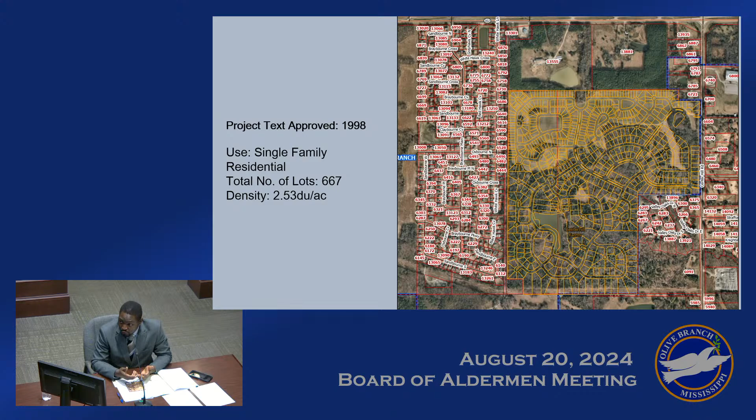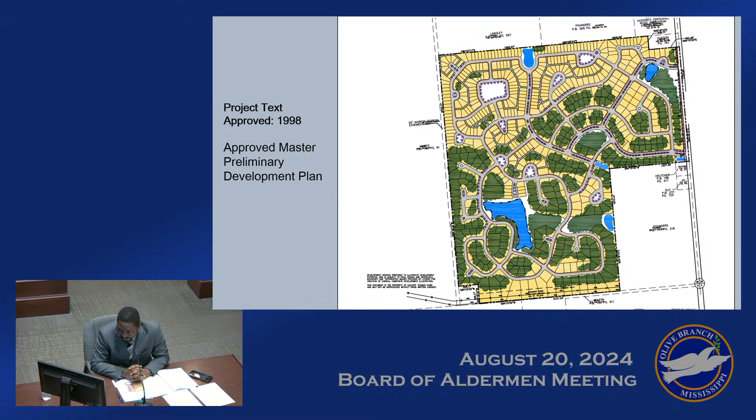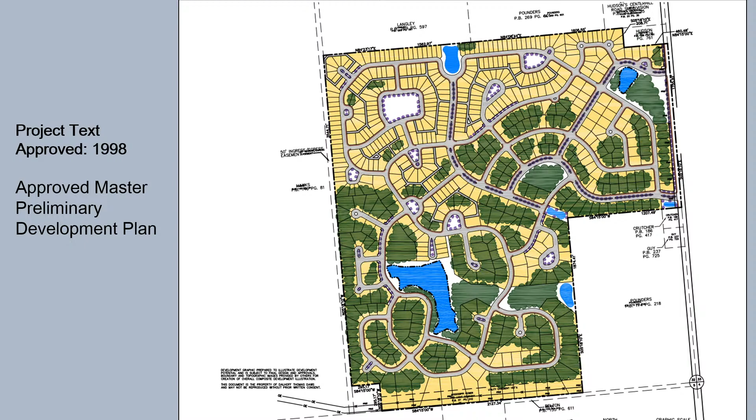On your next slide, this is the approved master plan as it was approved back in 1998. The areas shown there in blue, those are essentially areas that were preliminarily designated for stormwater management. You have a number of common open spaces that were approved in the subdivision. If you look at the areas shown there in yellow, there are a number of alleys at the back of multiple lots to the north. So that particular area has smaller lots, and the preliminary development plan required that they should be rear loaded and accessed through those alleys.

On your next slide, the developer has had to make a change in this preliminary development plat precisely because of the county's decision to extend Nail Road from Hacks Cross Road to the west, across this property at its southern edge, up to Center Hill Road. Nail Road is to be extended to Center Hill Road. With that extension, the lots that you had to the south of this property, all of those lots basically where the road is going to be are going to be taken out.

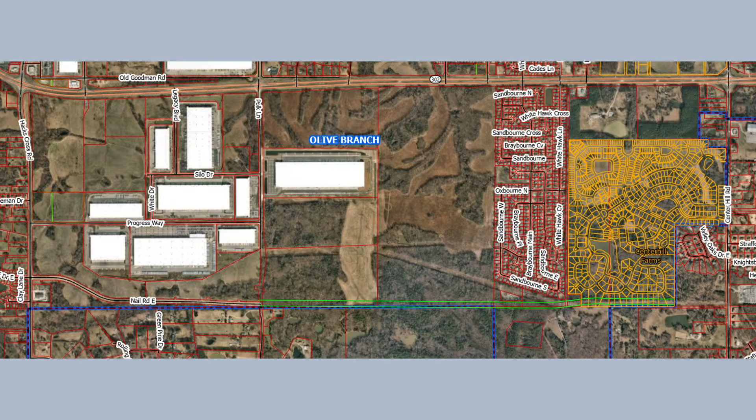The developer has therefore had to redesign the southern part of the subdivision as you see on your next slide. So the area shown there, that is the area that he has had to design to basically do one main thing, to provide a connection of that road down to what would be the new Nail Road.

So at the time when this preliminary development plan was approved, there was no Nail Road, there was no plan for that extension, it was not provided. Now that Nail Road is going to be extended, the developer has had to revise or make a few changes to that southern area to provide for that extension.

The developer proposes to develop this subdivision in 11 phases. With that change at the south end of the property, the number of lots that the developer is proposing has reduced from 667 that was approved by the county in 98 to 604. So the developer is actually losing over 63 lots in order to do that. So I did mention he's proposing to develop this subdivision in 11 phases.

A key element that comes into play with regard to this phase development has to do with the availability of sewer. The city engineer has evaluated and communicated with the developer that this particular subdivision will discharge into Brabham. The sewer plant at Brabham does not have the capacity to take in 604 lots. It does not have that capacity. What it has capacity for is 150 lots.

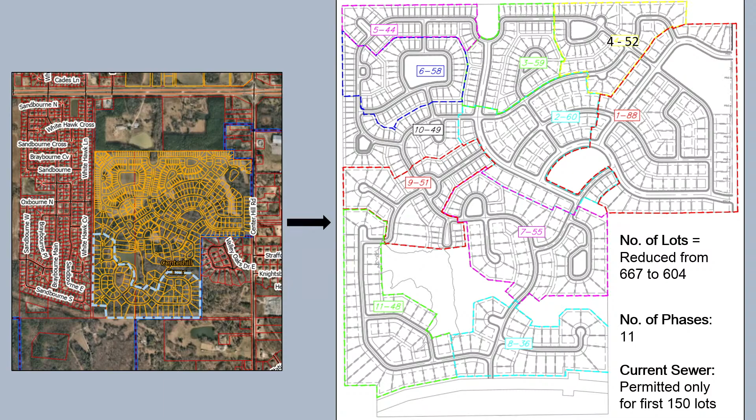Before the developer can move forward beyond 150 lots, it will require that they build an existing or a new sewer plant in the city that can take care of the lots that he will be creating beyond that point. So there is an approval condition in that planning commission did recommend to address that particular issue.

The next slide shows what was approved with respect to lot sizes in this area that is being modified. In the image to the left, you have the area designated there in green, kind of marked out in green. It had area 1, the minimum lot size there was 40,000 square feet, area 3, 20,000 square feet, area 4, 15,000 square feet, and area 7, 12,000 square feet. So the lots in that area range in size from a minimum of 12,000 square feet to 40,000 square feet.

What the developer is proposing from the modification that he has made, the minimum lot size will be 15,000 square feet, and the largest lot size will be 42,265 square feet. So in that particular area, what he is proposing, he has actually increased the minimum lot size. So what was approved by the county, the minimum lot size there was 12,000 square feet. What he is proposing, a minimum lot size will be 15,000 square feet.

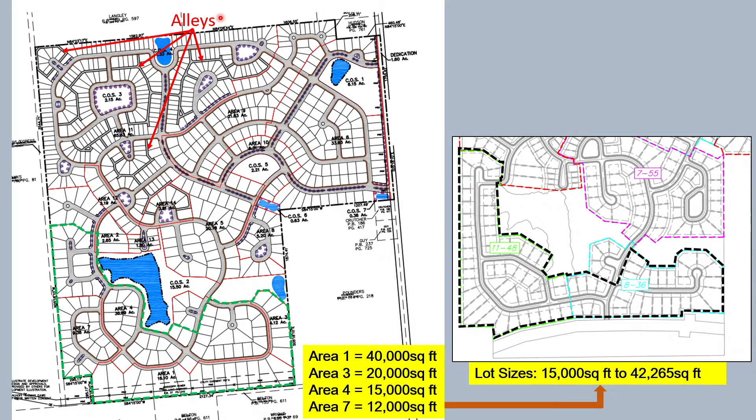On the next slide, as I did mention, you have those alleys to the north. All of those alleys will have to be provided, and they are actually included in this preliminary plat for your approval. The next slide shows the construction of these alleys. A problem we have had in the city has been the standards to which these alleys should be constructed because of the situation we have like in Stonecrest, where these alleys don't last. There is significant liability to the HOA.

And the board basically set a standard for the construction of these alleys in the Villages at South Branch subdivision, where you required that they shouldn't be V or U shape that allows water to get to the middle of the alleys and chop it off. All the water has to flow to the side of the alleys. And it should be constructed of the same thickness as the local public streets, basically. What you have in front of you is the Villages at South Branch construction plans. So everybody in the city is building to that standard, and the recommendation of the city engineer is that the alleys in this subdivision should also be constructed to this standard.

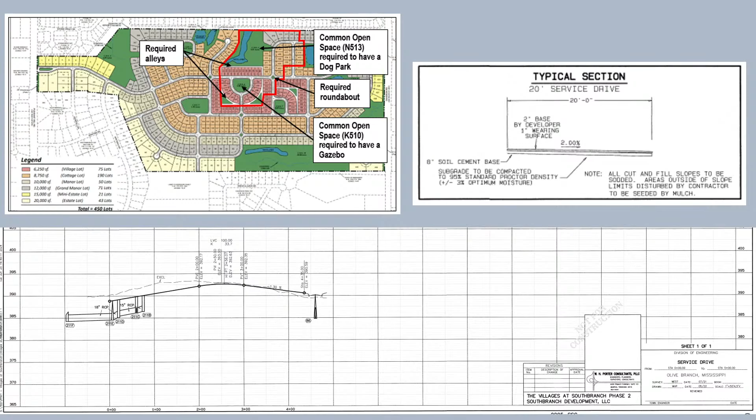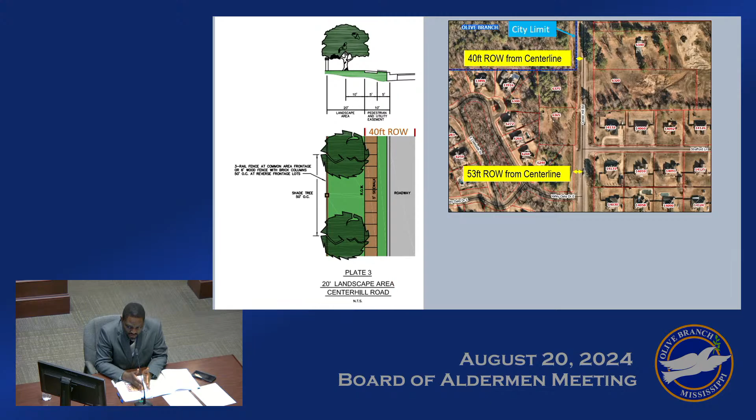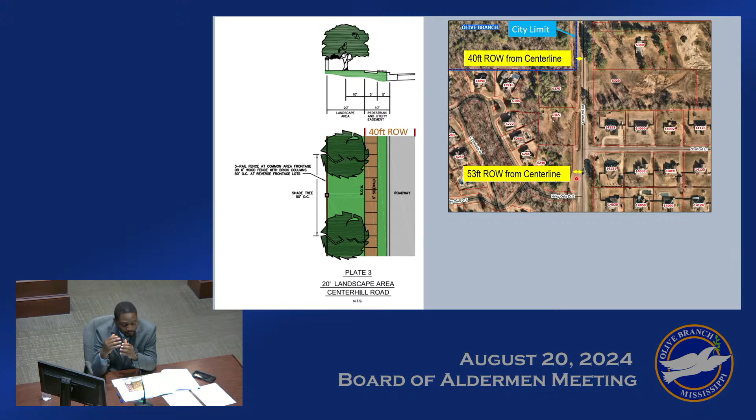That included the construction of a sidewalk, curb and gutter on Center Hill Road, and a fence. Currently, if you look at the picture, or the map that you have in front of you, the area to the south in front of Valley Oaks subdivision has a 53-foot right-of-way from center line. So that is what that subdivision was required to dedicate in order to provide a 2-lane road cross-section, ditch, and open ditch with curb and gutter for future extension.

The existing right-of-way in front of this property is only 40 feet. It's not up to 53 feet. The plat that was considered by the Planning Commission included a requirement that the developer dedicate 53 feet right-of-way to basically match what you have in Valley Oaks to the south.

To address that particular scenario, the recommendation before you is that the 40 feet right-of-way that was required in the preliminary development plan and which is currently shown here should be maintained, and then the developer will dedicate 13 feet of a drainage and utility easement. That drainage easement, 13 feet, will basically be for the open ditch for stormwater management on the rear of those lots. That will be maintained by the property owner since it's basically an easement. It's part of the real estate of those particular lots.

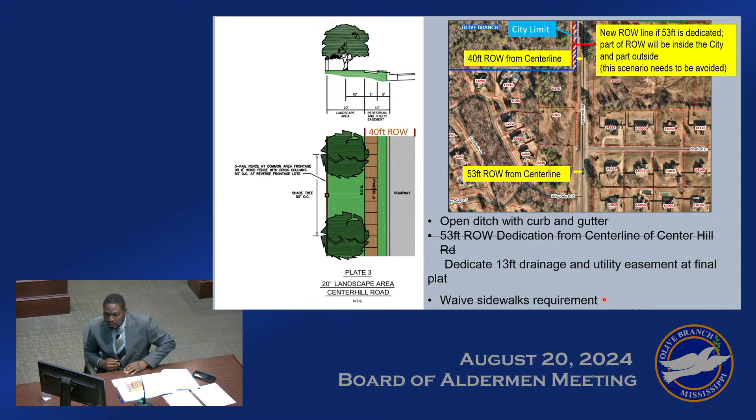Your next slide shows the plat that was considered by the Planning Commission. There are two elements here that I wish to call attention to. The first is where you have those 3 lots adjoining Valley Oaks subdivision to the south. There are property owners within Valley Oaks that have certain recreational facilities quite close to the property line. And the developer has worked with them, basically at his discretion, with respect to the grading of that particular area.

If you have to bring down the trees and grade it, and you have a swimming pool that is barely 7 feet from the property line, you may have roots of those trees under that swimming pool. If you are not careful, it's going to create a lot of destruction on the adjoining property. So the developer has worked with that property owner to relocate those 3 lots to a different area and leave that as a common open space. You will see that on your next slide.

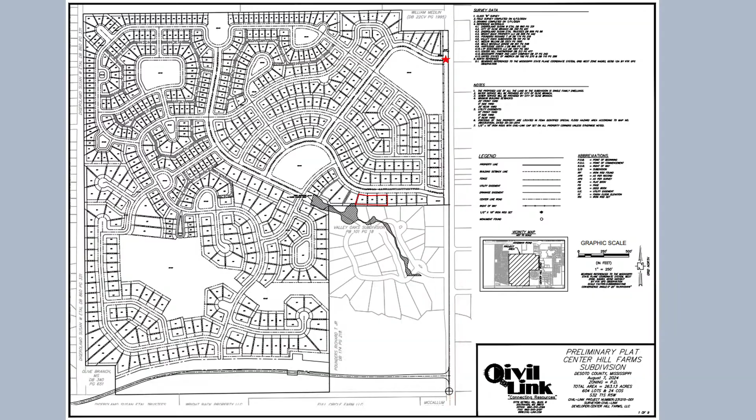The second element, where you have the star, thank you, Jason. Where you have that star, there was an email that one of the residents in Valley Oaks sent around, calling attention to a possible sight distance problem for this particular street where it intersects with Highland Lake. The city engineer went out, took a look at it, and determined that yes, there is a sight distance problem if that street intersects with Center Hill Road at that particular location.

The best location will be for the street to be moved to the north, to the high point. That's where you have the furthest visibility on both sides of the road. Consequently, the applicant has revised this plat. So the plat to the right, that is a revised plat for Board of Aldermen's approval tonight.

That plat includes the relocation, or that particular road has been moved to the north. So it's now at the top of the hill. From there, you can see over 500 feet in both directions. That eliminates the sight distance problem.

With that design, if you enter the subdivision from that particular location where you have the star, you have over 1,000 feet of a long street going down. That can become a speedway throughout that subdivision. As such, it may be necessary to put traffic calming mechanisms such as roundabouts, shown there in those blue circles, in this subdivision. A condition has therefore been added to what the Planning Commission recommended regarding these particular calming mechanisms.

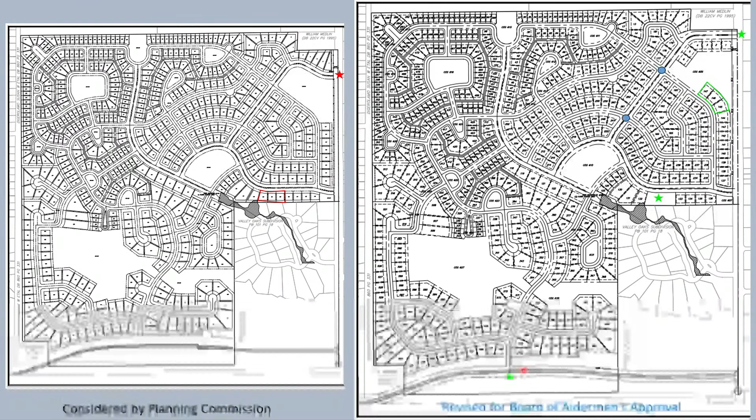With this redesign, there will also be a connection to Nail Road to the south. So the developer will be already entitled to 2 roads connecting to Nail Road. So those 2 roads are maintained. They are now at safe locations. And then you will have a connection to Nail Road to the south to disperse traffic within this particular subdivision.

The next slide shows a concern. I added this particular slide because in that particular email there was an issue regarding easements that one of the residents raised, asking for an easement, over 100 feet, that could be dedicated in the Center Hill Farms subdivision. That is controlled in the zoning, in the Act of Zoning.

So in 98, when the county approved the preliminary development plan, there was no requirement for that easement. So in their project text, preliminary development plan, it had no requirement for the easement. Of course, you had no Center Hill Road extension, and also Valley Oaks did not exist, because Valley Oaks was approved after Center Hill, I think that was 2005 or 2006, after Center Hill Farms was already approved.

It would appear that the developer of Valley Oaks took that into consideration. And so what he put in the subdivision plat for Valley Oaks was a requirement for an undisturbed area to the north. So if you look at all that hatched area, that is over 30 to 40 feet that was supposed to remain undisturbed, non-buildable in Valley Oaks subdivision.

It's unfortunate that it appears today some of the homeowners have taken down their own buffer, if I can put it that way. So any buffer within Center Hill Farms will really be at the discretion of the developer, because what we have here is a preliminary plat and not a zoning act. The city is not approving a preliminary development layout plan.

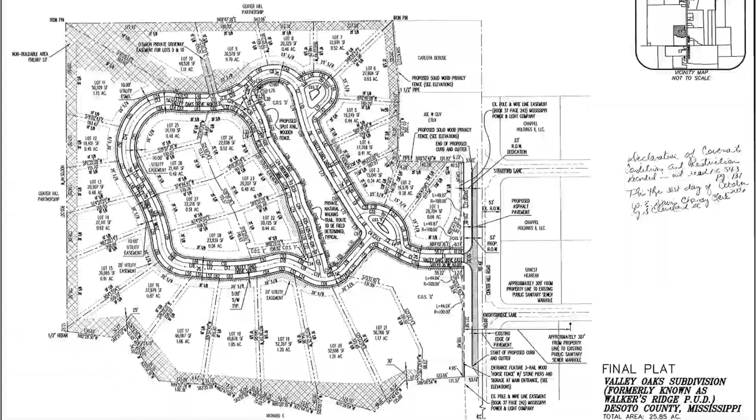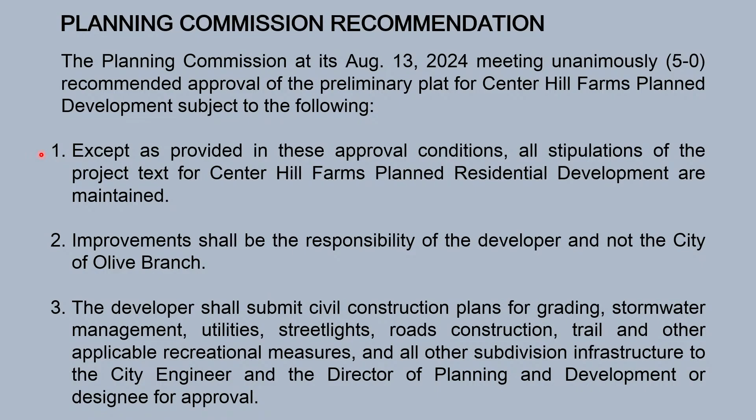The next slide is the recommendation of the Planning Commission and amendments thereto. At its meeting on August 13, the Planning Commission unanimously recommended approval of this preliminary plat subject to a number of conditions. Condition number 1 there being, except as provided in these approval conditions, all stipulations of the project text for Center Hill Farms PD are maintained. What are some of these exceptions or modifications? The next slide, please.

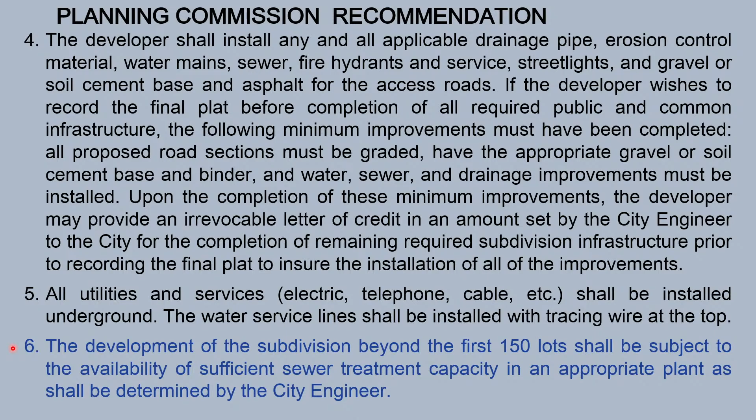Condition number 6 specifies that the development of the subdivision beyond the first 150 lots shall be subject to the availability of sufficient sewer treatment capacity in an appropriate plant as shall be determined by the city engineer. So that is intended to take care of that 150 lots, the capacity problem that we have as far as the sewer plant is concerned. And the developer is okay with that restriction.

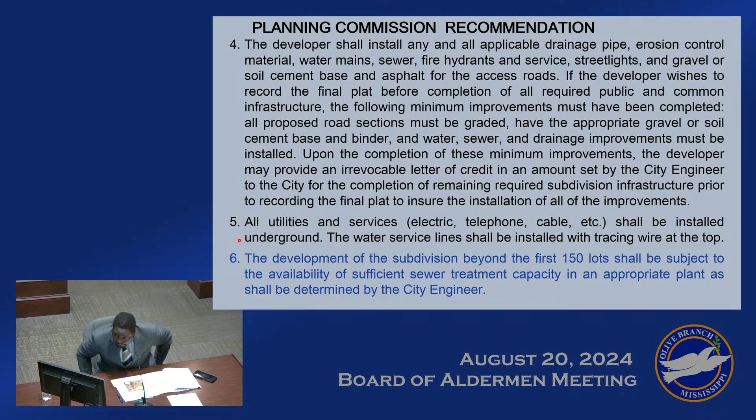The next slide continues the Planning Commission recommendation. Condition number 8 had stated that the requirement for sidewalk construction along Center Hill Road is waived, subject to the developer dedicating the 53 feet right-of-way that I did mention. That is, if that were dedicated, we would have this problem with part of the road being in the city and part being in the county. So that is proposed to be deleted from the approval conditions.

The developer should rather be required to dedicate at final plat a 13-feet drainage and utility easement along Center Hill Road. The developer, however, shall be responsible for widening Center Hill Road with curb and gutter in the street frontage of the property to such street section as shall be determined by the city engineer.

Condition number 9, the 20-feet wide landscape area along Center Hill Road as depicted in plate 3 of the project text, which I had shown, is hereby reduced to at least 7 feet and shall contain a fence and a row of trees as shown in this plate. So in the project text, it was 20 feet. This particular condition would allow it to be reduced to 7 feet in order to give room for the dedication of that 13 feet for the drainage improvements on Center Hill.

Condition number 10 addresses the alley issue, the alley construction standard. The pavement schedule of any alley in the subdivision shall consist of 8-inch soil cement and 3-inch asphalt surface. It shall have a pavement width of at least 18 feet, with a 2% slope in only one direction. A V or U-shaped design for any alley is prohibited. That is intended to take care of the design standard for alleys.

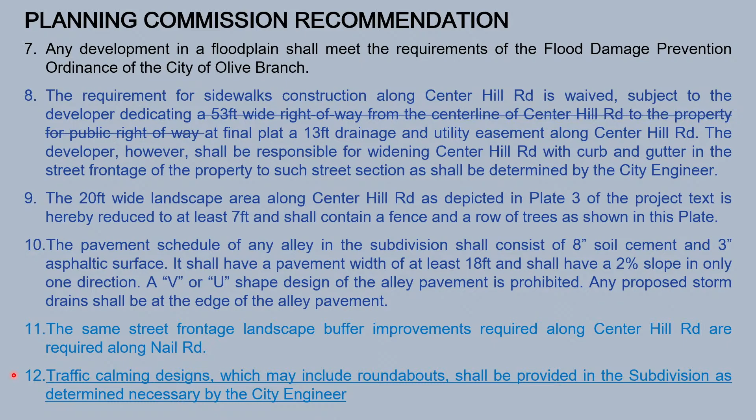The developer should also install a fence and trees along Nail Road. Lastly, traffic calming designs, this is an addition. This number 12 was not considered by the Planning Commission and is based on the change or movement of that road to the north for sight distance reasons. Traffic calming designs, which may include roundabouts, shall be provided in the subdivision as determined necessary by the city engineer. And that concludes staff's presentation.

Thank you. Thank you, Mr. Song. Board, just want to clarify two items.

One, Mr. Swims, 150 lots is what this has been restricted to until sewer capacity is increased, which is being worked on. However, we are not at sewer capacity just because of 150 lots, is that correct? That is correct. We've got a number of different developments that are kind of competing for sewer. Brayborn does have capacity limits that we're going to achieve, but we're not there yet. This is the lagoon we're talking about at the back of Brayborn subdivision.

The city is intending, or working toward, getting the cold water treatment plant over off of Center Hill Road. We've got a definitive timeline on it, so we're looking at this annually just to see how progress is being made with the development and with the treatment plant that's planned. So we've got a plan to keep development going, as far as I can tell.

Thank you. I just didn't want to send the message that we're out of sewer capacity, because we're definitely not. We're trying to be conservative and spread the joy, so to speak, among the other developments that may or may not be approved. That's being worked on, the Center Hill Treatment Facility or plant, and also other water and sewer expansion we're putting in over the next 2 or 3 years on the east side of the county that will basically ensure growth of Olive Branch for the next 2 decades.

And Mr. Dye, I know that it was stated that in 1998 this plat was approved by DeSoto County before it was annexed into the city of Olive Branch. Valley Oaks was approved in 2006. By state law and by precedence, cities are required to bring these properties in. Once they come in, they're required to bring them in with the same zoning that they had prior to coming into the city of Olive Branch, correct?

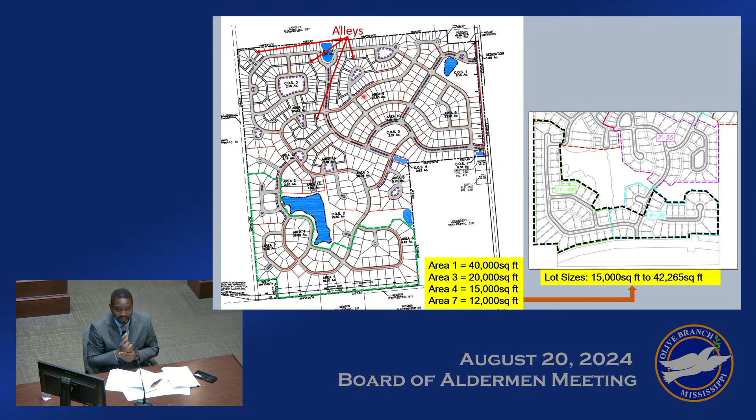Yeah, that was the Kirk Farms zoning change. We were approving the preliminary zoning development plan change, that's right. And I think, to Song's point, that particular procedure was different than what is on the board's agenda tonight.

When the board was considering Kirk Farms, it was actually considering the development ordinance for that particular property on that night, and that was the opportunity where the jurisdiction existed to adjust those lot sizes. Tonight, what's before the board is a preliminary plat that's been presented and prepared in reliance on the zoning that's been in place for 26 years.

Right, and so procedurally and jurisdictionally, the board's in a different footing tonight than it has been in the past with other projects. Okay, then that clarifies my question.

Thank you. However, it doesn't prevent the landowner developer from working with the residents that may be here tonight to speak out. That would be, and it's already been done to a wide margin, very generously, but that doesn't prevent him, the landowner, from doing that if he wishes to. And I encourage discussions. I'm gonna hear you out in a moment, but I'd encourage discussions a little bit later on that. Any other questions from the board?

I do have some questions for clarification. There are a lot of open spaces that are pointed out. Are any of those going to be designed for parks? I heard you mention the dog park. Are any of the other areas, or are they just common open spaces? Is the applicant here?

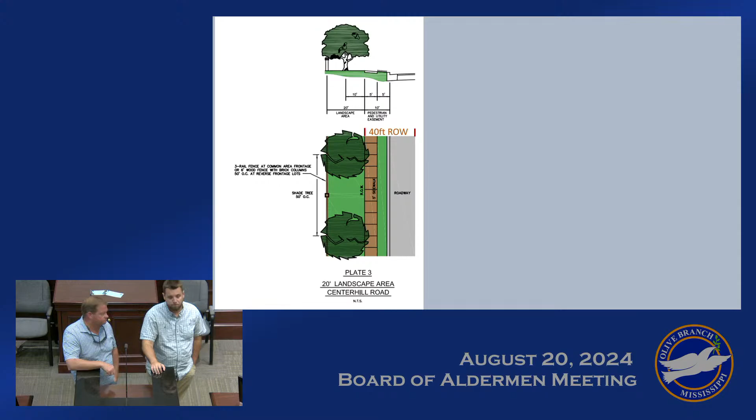Mr. McBride, I'll readdress my question. You don't have to do this, but please consider it. We've looked at our PUDs to keep a consistent balance of lot sizes, limiting subdivisions to no more than 20% of lots under 7,200 square feet. I noticed an area of 6,000 to 8,000 and one of 6,000, but I didn't see a lot count. I know when we acquired this property it went from 667 lots down to 604 lots, which is a huge impact on the property as a whole.

But in doing that, a lot of the lots that were at the bare minimum of 6,000 have gotten a little bigger just in the shape of the project. We will look at that as we go through final plats. I appreciate that, we can work with planning on that 20% area, give or take a little.

Thank you. The picture is up right now. I think we added some roundabouts in there, did we not? A couple roundabouts, yes sir. I know the rest of the subdivision doesn't show them, but that would be addressed later on as traffic, since 600 houses is a lot of cars going through the neighborhood. That's right, yes, it'll be shown on our construction plans once we submit to the city.

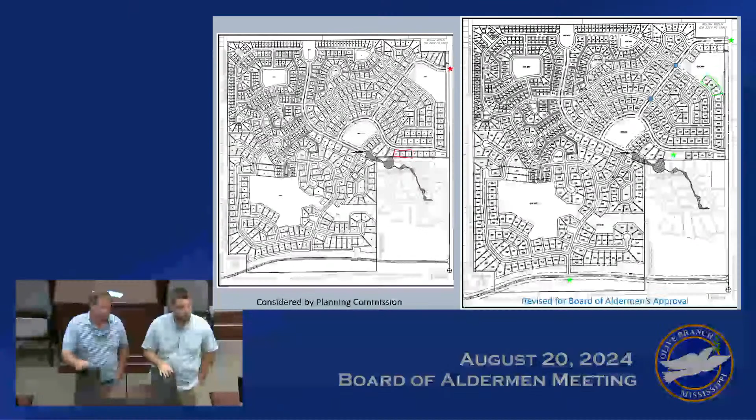Any other questions, board? Hearing none, does the applicant wish to add anything that was not covered by the staff report?

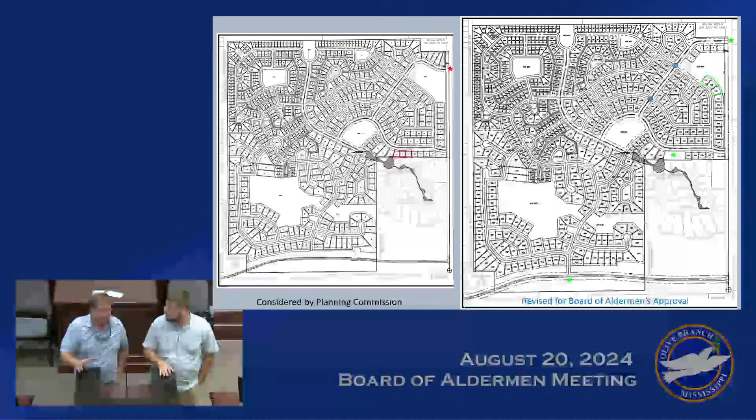I think other than the fence around Valley Oaks, everything was covered in the staff report. Unfortunately, we acquired this property and assumed it was zoned as it is. In talking with people in Valley Oaks, we made a few concessions where we feel this subdivision would impact them, adding the fence. For the rest of the lots surrounding that, we feel with the grade changes proposed, a fence would block sight. Understood, thank you. Absolutely.

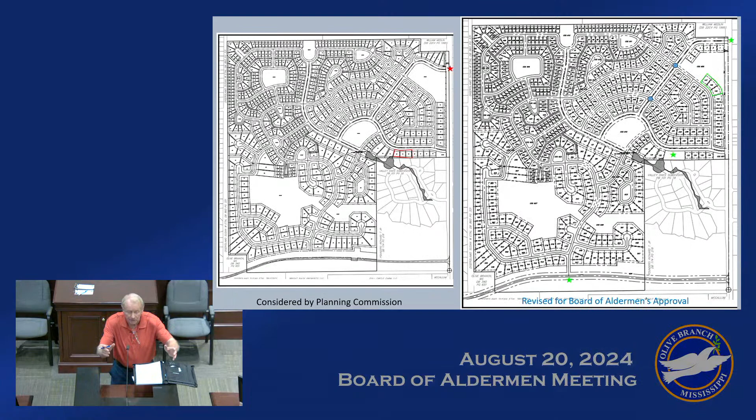The retention ponds we see there, we have concerns about the drainage from all those retentions. They're coming into that creek right there. That's coming right through Valley Oaks. So we want to meet with the attorney, these guys, and the civil engineers as they move along to make sure that we're comfortable with what's being developed, because water is very powerful, right? And if you don't address the problem up front, then you're going to have a hell of a cost downstream. So that's one of our concerns.

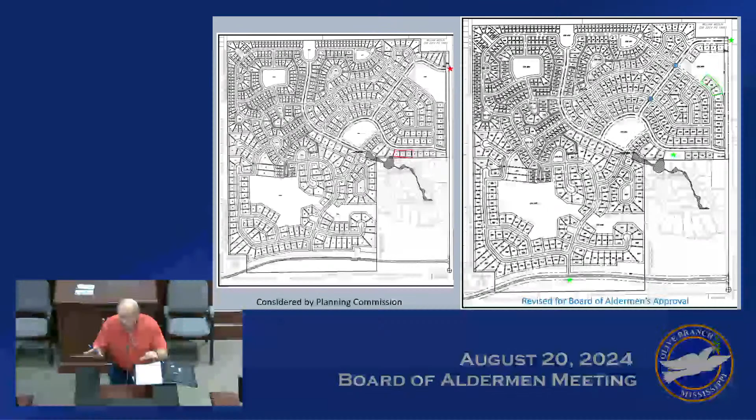I don't know if you, ladies and gentlemen, are familiar with Valley Oaks. It's 28 lots. There's 22 houses. Some people bought 2 lots, all right? These are all custom-built houses. Minimum square feet, 2,800. Average square feet in there is 3,600. So these are above normal houses. This development is, my understanding, going to have maybe 3 tiers of housing in there, right? I mean, that's what I understand.

All right. We're concerned with the houses butting up to our subdivision. We don't want a 1,200 square foot house butting up to our 3,800. It's going to devalue our property. That's our concern. And we'll be glad to meet with the developers, and we would like them to consider, because I know they got some large houses in there, taking those and putting them where they're going to butt up to our subdivision. And since this is development stage, I know that they can do it. So that's it. Thank you very much. And Brian, again, I'd like to meet.

Thank you, sir. I will just answer for him because he's in a unique position. He represents the board and the city. I'll commit 100% the engineer and his staff, and the developer can meet if he wants to, but it's really not a legal issue. It is an engineering issue, and we deal with retention water, stormwater runoff on a daily basis, and we'll make sure you get your help. I'll give you my card. Thank you. Sir?

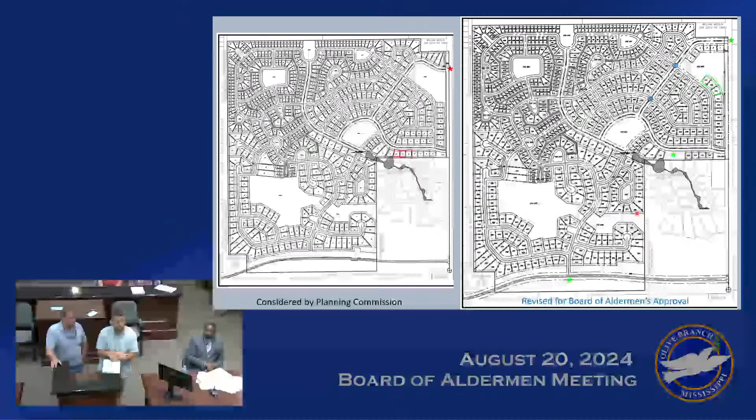So instead of doing 18, I could go ahead and say tonight that those lots that back up to Valley Oaks, I would do 2,200 square foot minimums on those lots that border them. And we can make that a part of the approval so that at least they're of the bigger, now that's not with the PUD, so I don't know how that works as far as the approval goes. That would be 2,200 heated, right? Correct. Anything else, boys? Thank you. Absolutely.

Mayor Adams, I do have one procedural question. Whoever makes a motion, if it were to be motioned and passed, item number 12 that was added, we don't have that in our package. So does that need to be part of a motion, or is that assumed based on the updated report that would be in there? I don't want to be presumptuous as to how the board may want to vote. If a board member were inclined to approve this, a motion to approve as presented by planning staff would be appropriate.

And the 2,200 square foot minimum, typically that's something that's rolled into a project text approval, which is not before the board tonight. My recommendation would be that if the developer commits to that, that be rolled in, likely as a plat note on the final plat. That you would have on the notes section of a final plat a note about house square footage on particular lot numbers.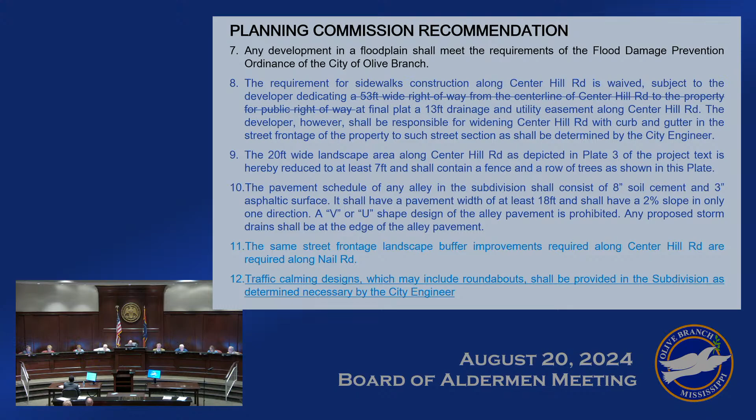And that rather than that being a condition of approval tonight, that be something that's reflected on a final plat. I think procedurally that would be the better way to reflect that approval, in the project text of the final plat. That's right. Any other questions, comments, or motions? I'll make that motion to approve it as presented, including all 12 items from planning staff. Motion by Mr. Dickerson to approve as presented, items 1 through 12 included, and second by Mr. Wallace. Any discussion? All in favor? Aye. All opposed? Motion carries. Thank you to the developer and the residents for working together, very much appreciated.

Item number 2, public hearing date for consideration and action on motion declaring the condition of the following properties to be a menace to the public health and safety, and directing either the city staff or contract labor to clean the property forthwith. Really only one other property remaining. Is anyone here on behalf of the Kid Jarrett and Jessica property on Quail Road? The board may recall this is a property where the house has been taken down. It's been demolished, and there have been pending criminal charges for at least one of the parties, and this has been cut a couple times by the city and is in need of cutting again, at the end of Quail Road near Dupree.

Mayor, I did have some news to report. Our code officer was able today to track down the new owner of the property. It's no longer the Kids. Good. And the owner said he has had a couple people lined up to cut it. They haven't shown up, but it appears he's been connected with someone that does regular mowing for the city, so we feel pretty confident this will get done. I don't know if that means you need to table it; that would be up to the board. Mayor, it needs to either be tabled or no action, because if there's a new owner, there could be a deficiency with legal notice.